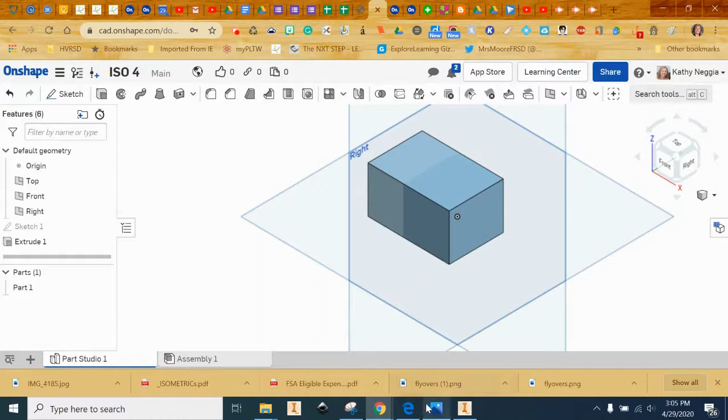Creating ISO 4. You'll notice that I already started the creation by creating a rectangular solid with the following measurements: a width of 2.25, a height of 1.25, and a depth of 1.5.

For the first step, we're going to place a circle with a diameter of 0.25. We're going to place it 0.75 inches from the right and 0.5 from the top.

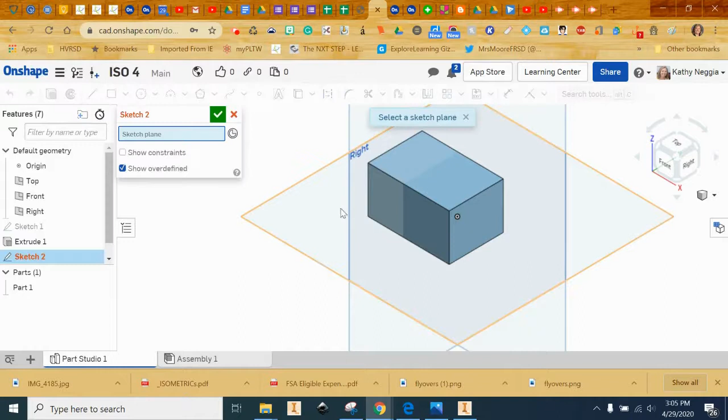So let's create our sketch on this front plane. Look at it from the front and create a circle. Okay, the diameter of our circle is 0.25.

And we'll go to the dimensioning tool and get some dimensions. So from the center to the edge, that is going to be 0.75. And then from the edge to the center, that will be 0.5.

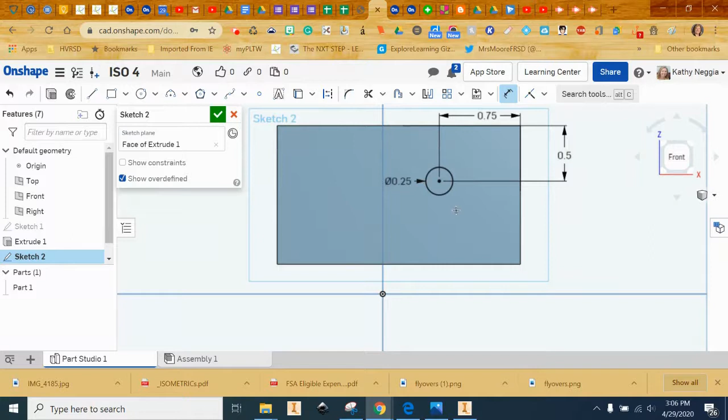Now we have our hole placed with the right size and at the right placement. So let's click on OK.

Looking at this from an isometric view, we're going to extrude away that hole. So we'll choose Remove. We're going through the entire object and we're going to remove that.

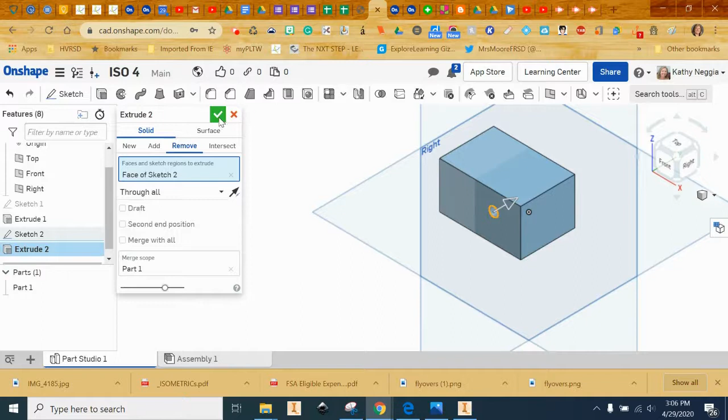Doing that, you'll notice when I rotate around, I have a hole. The next thing we're going to do is we're going to remove this section. You'll notice that it looks like a half circle.

So with a half circle, the center would be here, the radius would be 0.5, and the diameter would be double that. So let's draw a sketch on the top.

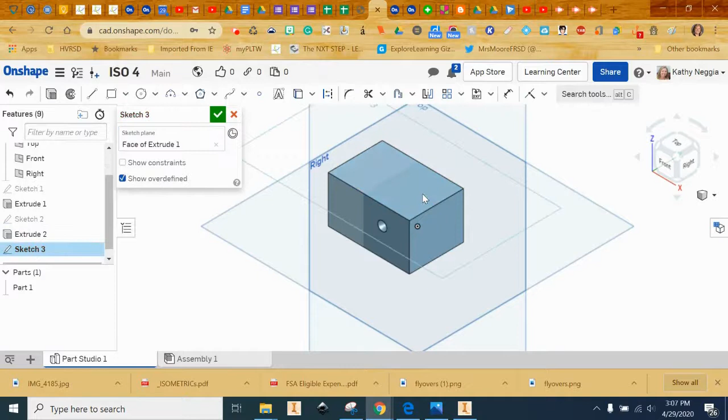And let's take a look at it from the top. And we know we're going to create a circle whose center lays on this line. We know that the diameter of that circle is going to be 1.

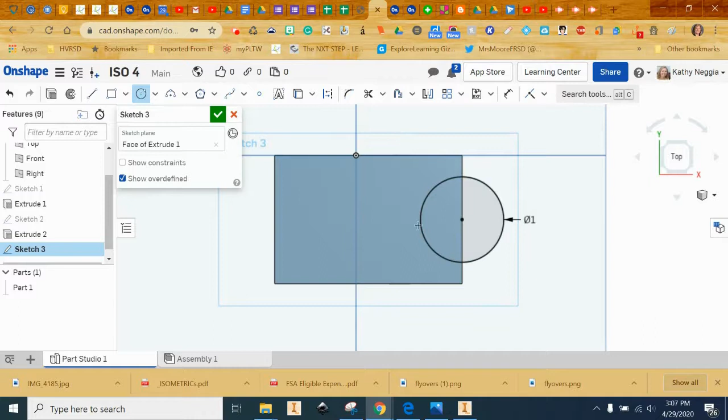Okay, now let's just make sure that our other dimensions are correct. So from this point to here, that should be 0.25. And from this point to the edge, that should also be 0.25. Okay, so we know it's placed correctly.

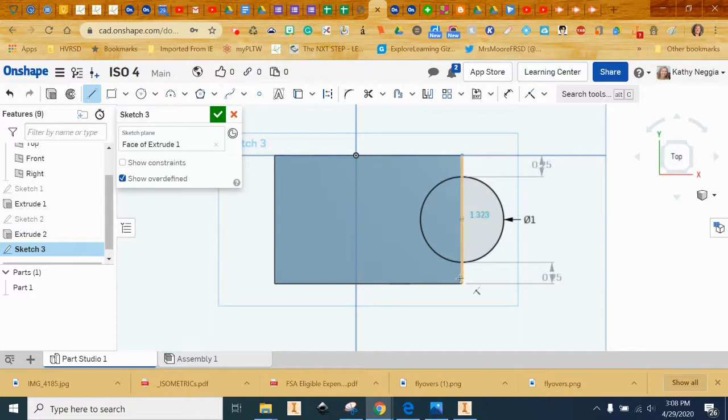We'll need to create a line so that we can trim away the parts of the circle that we don't need, and we'll just make a nice vertical line there. Hit the Escape key. Use the Trim tool to take away the part of the circle that we don't need, and complete our sketch.

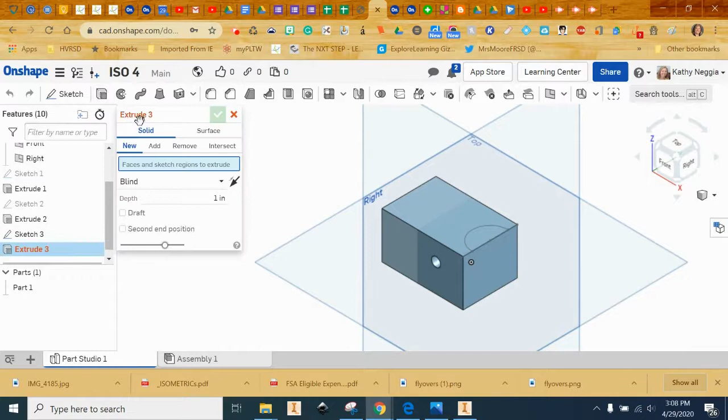Let's extrude that away. We'll go to the Extrude tool. We're removing it through the entire object, and this is what we're removing.

Okay, that leaves us with one last piece of the puzzle, and that's removing this half circle from the left side of the object. So I know that my total depth is...

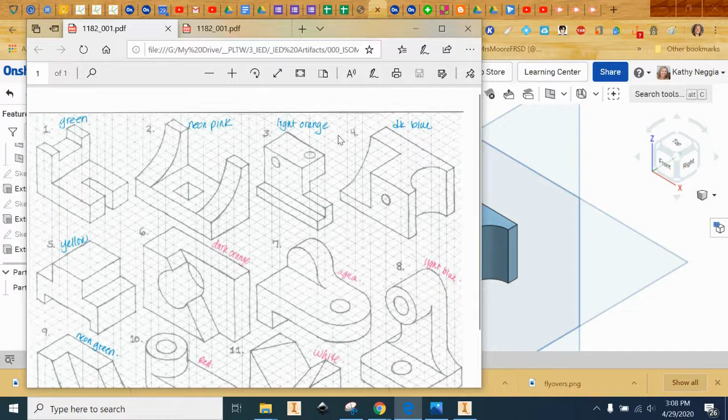1.5. So here's a 0.5. So I know the diameter of my circle, well, actually, I know that the radius of my circle is going to be 1, so the diameter is 2.

So let's come over here and, oops, wrong way. And let's look at the left face. We'll zoom in a little bit and we're going to create a sketch on that left face.

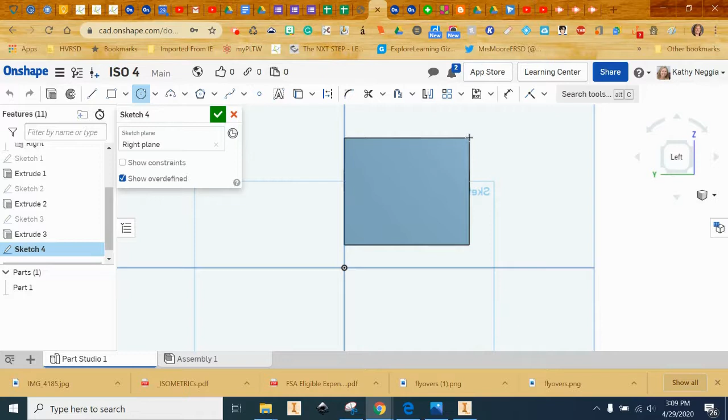We're going to create a circle at the, oops, let's see. We're going to create a circle on the edge of that. I think we need to choose our plane again. Okay, that looks better. It's the face of the extrusion instead of the right plane.

So we're going to create a circle. Notice I can get the yellow dot here. And I know that the diameter of my circle is going to be 2.

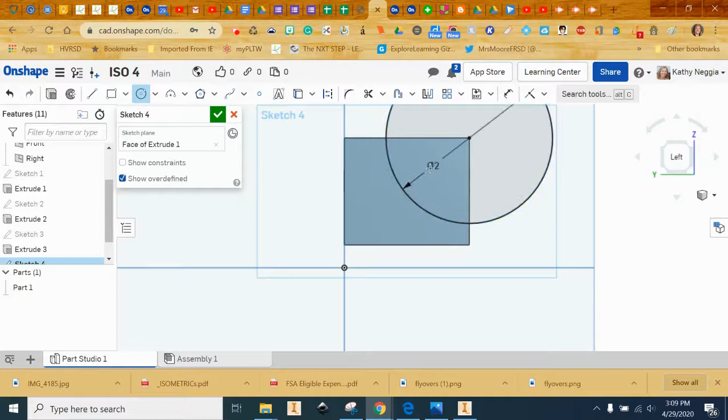Okay, so let's just check to make sure that this looks correct, because we already talked about the fact that that measurement should be 0.5 and that this measurement should be 0.25. And they are, so we know we have the right size circle and we know that it has been placed properly. Let's draw our lines.

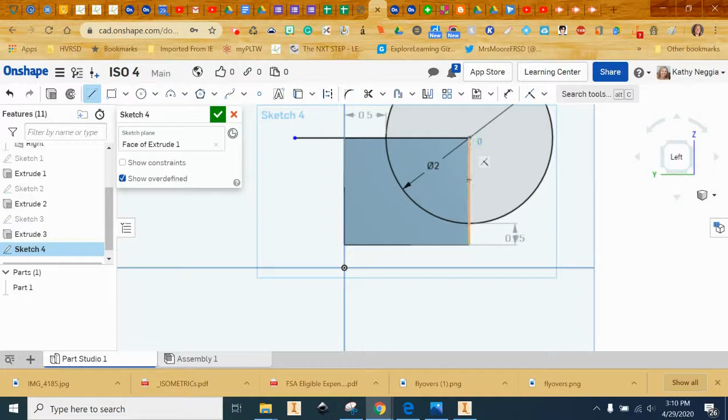Hit Escape. Draw another line this way. Okay, escape, and let's trim away this portion of the circle. That will leave us with this piece.

But instead of extruding it all the way through, we're only going to extrude it backwards 1 inch. So let's come back here and save our sketch.

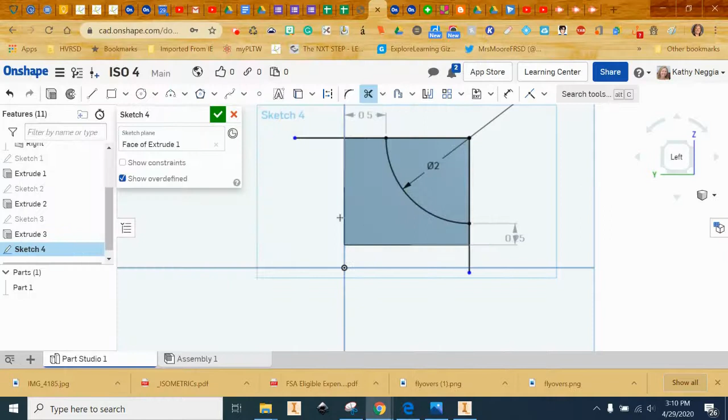Okay, we're going to extrude away 1 inch in the reverse direction. So we're going to extrude. We're going to go in the opposite direction. And instead we said we're going to go 1 inch. So what we're going to extrude is this.

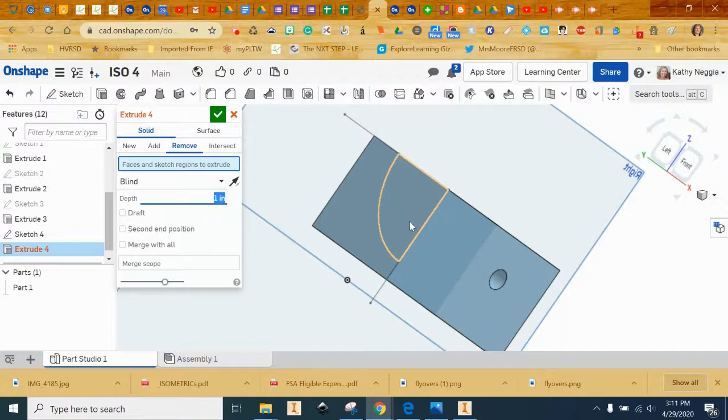And that is how you create ISO 4.